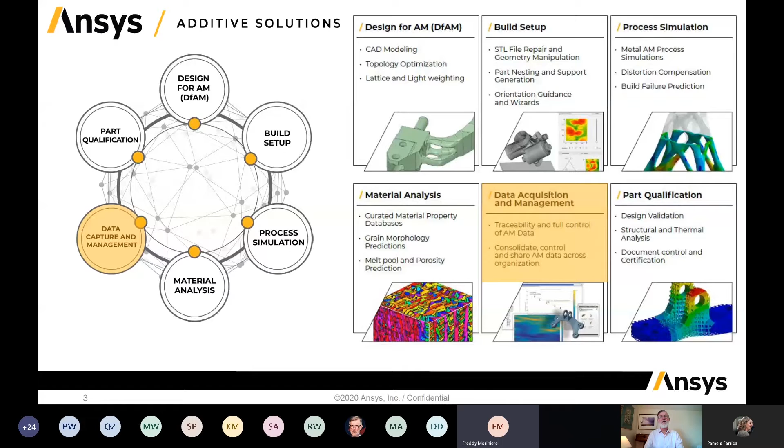So what do we hear in the field? Because this is our core practice. We listen to what our customers are facing, and we try to answer these questions as much as we can. So typically, first case, you are a program manager, generating data from so many different builds and different machines, and it's really hard to get a grasp of what you're generating in the first place. So what kind of data do you need to capture?

Then, from a materials engineering perspective, you store and review so much raw materials information, build parameters, and test results. Is it possible to analyze them against specifications from your customers or any regulation that you're working towards? From a certification standpoint, you need to review all the data which have been generated. Is it possible to have that in a single place, to help with certification and audit purposes?

And finally, when you are a design and analysis engineer in terms of simulation, you would like to reuse the test data that have been generated, let's say, 10 years or 5 years ago, and use that for design and simulation purposes. So you need to have full confidence in the data that you have.

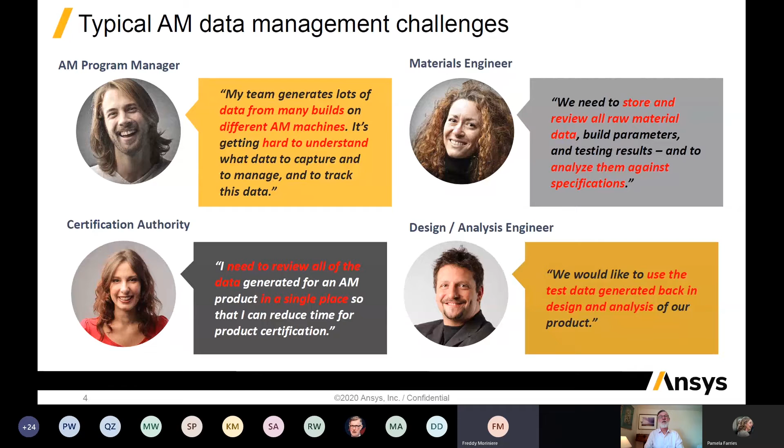Next, please. And to address all these issues, we've centered our capabilities in 3 key areas: ensure traceability, help the users perform data analytics, and integrate with downstream platforms like design, simulation tools, or even PLM. The reason we have done that is because from a software architecture, you can store everything in a single place in a Granta MI instance, which is hosted on the customer server, so it's secure for the customers. And we can store design engineering, parts production, and even qualification data.

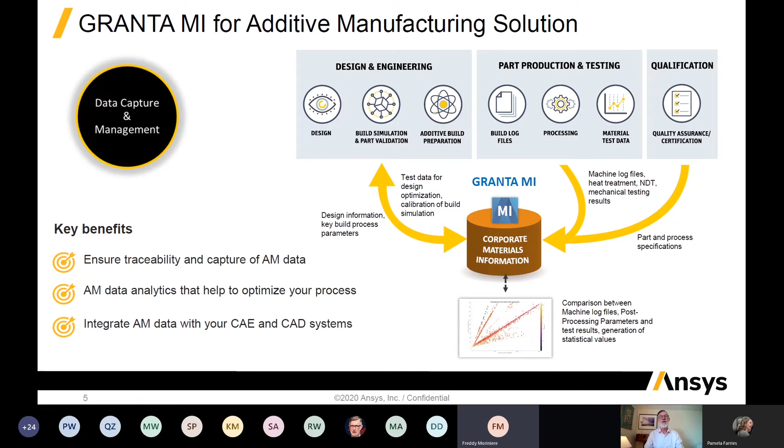And because it is in a single place, you have the possibility to pull this information and use it for what we are going to see in the next slide, please. So you can share this information with a wider community, and make sure, for instance, in testing, you provide all the testing requirements. For procurement, specify the types of powders that you are interested in, and for design and development, the A basis, B basis statistical data which have been generated from testing. So we have a wider customer pool, but we are using the data stored in a single place.

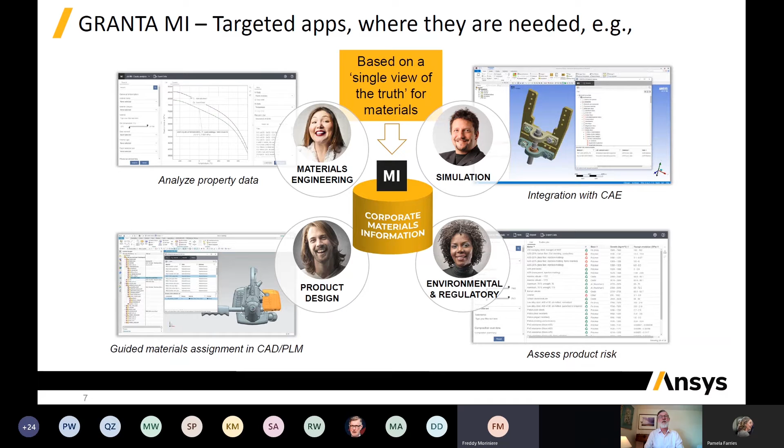Next, please. And to address all these user communities, you have different apps which help them see the data in the format that they require. And this is where you improve the communication between departments, and you improve efficiency between the teams, because they have the data readily available for their activities. Next, please.

So if we delve into the specifics of additive manufacturing, as we've seen earlier in the presentations, you capture different types of information for the powders, the build parameters, the different heat treatments, or the non-destructive inspections as well. And eventually you perform some mechanical testing. And every single part could be a silo.

But what we do is make sure these different formats, different pictures, and so on are available in a single place, because then you can create meaningful links to generate reports and potentially plot some graphs, like a material performance parameter against a process parameter. And this is where you nurture your knowledge about your processes. Next, please.

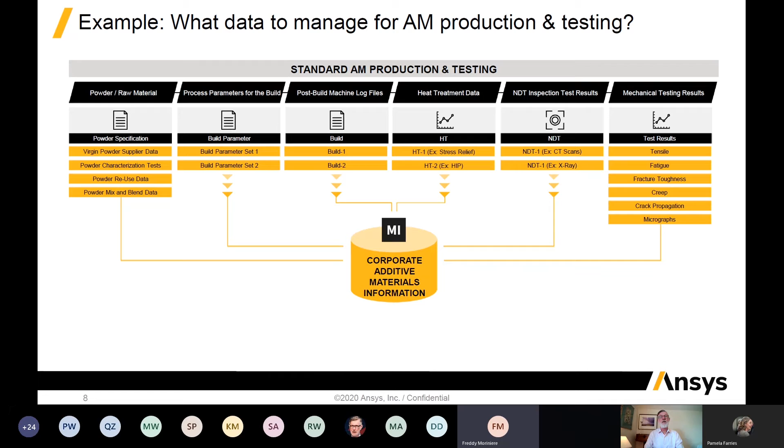And this is a typical example that we see in additive manufacturing. You use a single powder, so you create a part and then you have some test results coming in. And then when you use this same powder, but with multiple cycles of reuse, you see that the fracture toughness is going to be reduced.

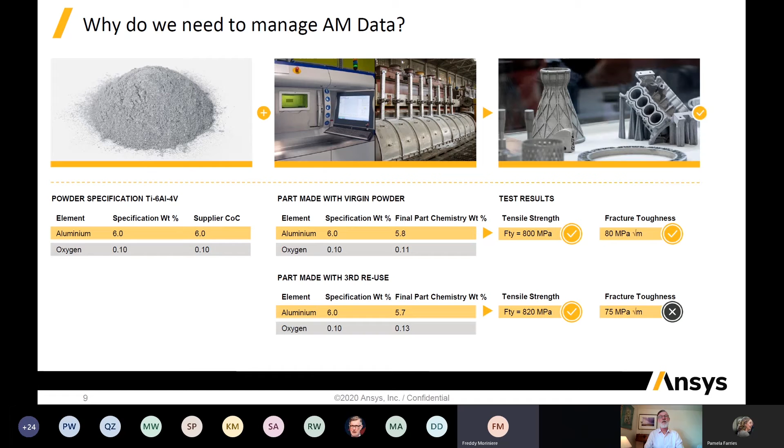So is there any way to prevent that by, I'm just saying it out loud, tweaking some processing parameters? So what do we need to optimize to be able to reuse the powder as much as possible? By looking back at the data which have been stored in the platform, you will be able to answer and address this question. That's the technical part. Next, please.

But when we look at the business perspective, knowing that you invest heavily in new technology, you would like to make sure that you spend your money as appropriately as possible. Because by introducing new technologies, new processes, you have to perform thorough test matrices and qualify the material as much as you can to be able to certify that you're going to deliver the product consistently.

And because it has a cost implication, you need to ensure that your stakeholders trust in what you're doing. And this is how you can ensure that, by showing them the consistency of the work that you've done from day one. Next, please.

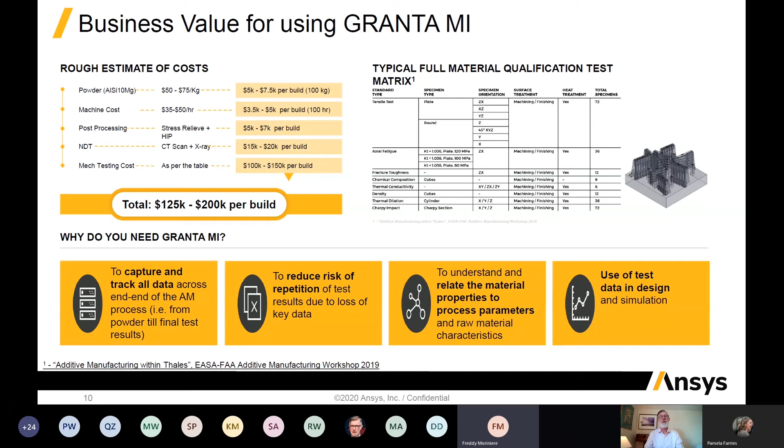And this is why, just to wrap up and make sure I'm in time, we can support our customers to maximize their investment in additive manufacturing. When it comes to powder batches, you want to ensure the full traceability of the blending or the recycle or the reuse numbers that you have in your companies.

When it comes to build manufacturing, you want to make sure you have error-free and efficient data import. You don't want to corrupt information which is coming out of the equipment, because this is a valuable piece of information from an optimization perspective. And I'm thinking here in terms of machine learning.

Then when you come to testing and validation, you need to make sure all the tests that you've done, even if they are not good, every information that you capture from a process is relevant. Because after that, in the downstream part where you will do some material and process data analysis, you will be able to identify some correlations that you potentially haven't thought of, because you can quickly visualize the data.

And eventually, once you've approved, validated, and certified the material characterization process, then you can share this information into downstream processes like simulation, design, or the procurement department, and quality check.

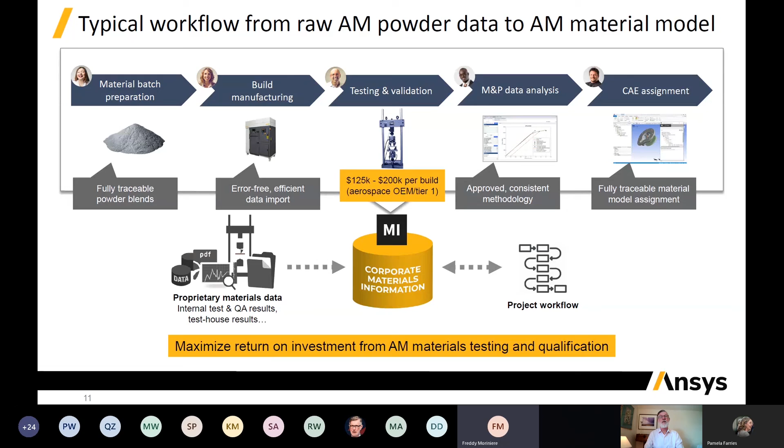As you can see, by having a single platform, we can enable the users to gather a wide array of materials information, and, in terms of project workflow, to leverage the structure of the database. Next, please. So, as I've said, we will help you in three main key areas.

Traceability, to make sure that you capture every information in the right place, in the right location throughout the additive manufacturing value chain. Next, it's not just about storing information. You need to analyze the data and visualize them in an efficient, swift manner, so we can provide that through the same platform. And eventually, ensure the continuity in a digital thread by pushing the data to downstream applications.

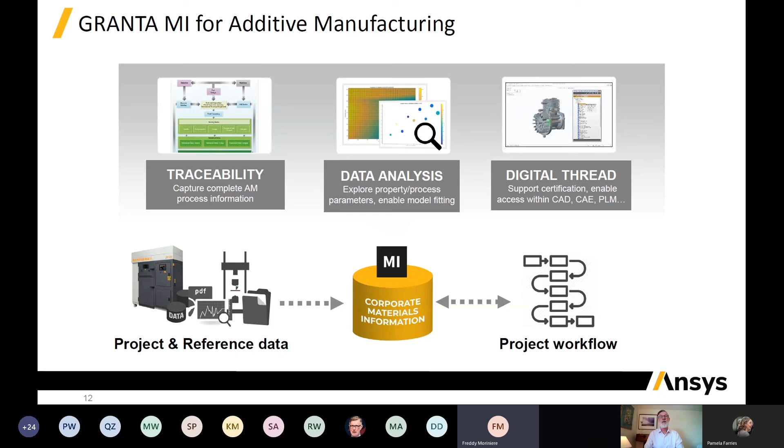And next, please. So I hope I have been concise and clear enough, even if I was limited in time.